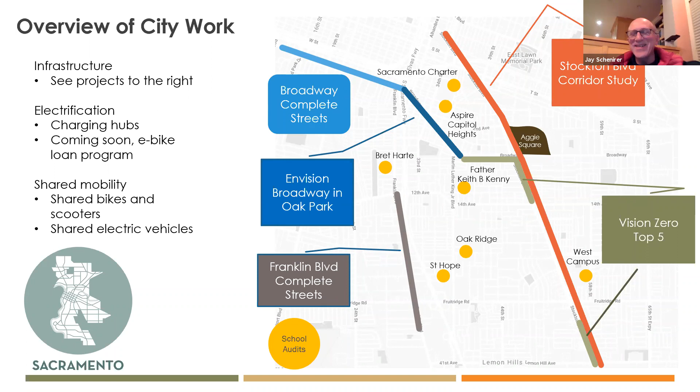Yeah, well, we have one quick question Eric is typing an answer to. I just did Google Maps, and it said about a 7-minute walk, 3 blocks, from the light rail to the hospital.

All right, terrific. Jennifer, go ahead and talk about some of what we're doing already. Great, thank you, Vice Mayor Schenirer.

So we're doing a lot of work. I've covered a lot of this already, but I wanted to highlight how it relates to questions around mobility, congestion and travel delay, and safety.

These projects will inherently improve mobility. However you move—walk, roll, drive, take the bus, share a vehicle—all of these will improve conditions, because our city is 170 years old, and a lot of our technology and infrastructure is almost as old as that. So we're working to improve that.

Whether it be a traffic signal or a curb ramp for a person with disabilities, or a parent with a stroller, we'll be improving curb ramps, because mobility really is about access and how we connect folks. That's why we're comprehensively building this connected map, thinking about the network through the neighborhoods and serving them for people moving around.

We're creating new bikeways. The Broadway and Vision Zero work on Broadway includes bikeways. The Stockton Boulevard project includes continuous bikeways north-south, where you see the orange area.

And obviously we're doing a lot of safety improvements. If you've heard me talk before, I'll continue to stress the importance of traffic safety in our city. We continually rank as one of the worst in California around traffic safety, and the biggest issue we face is speeding. One of the best things we can do is slow folks down, using signal technology to manage vehicle speeds while still allowing for throughput.

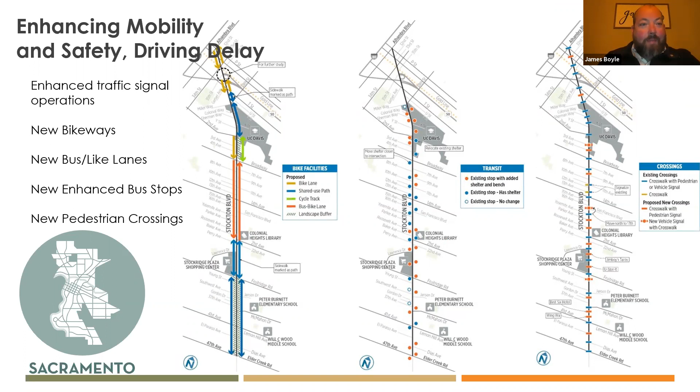All right, thanks, Jennifer. I'm James Boyle, Director of Planning with Sacramento Regional Transit, glad to be here this evening to talk a bit about RT and some of our services and transit mobility options for the general area. For those familiar with the area, we have Route 51, which is by far one of our most popular, most successful bus routes in terms of ridership and frequency.

And then we also have Route 38. This route basically connects from 65th Street Light Rail Station through down Broadway and then back up Stockton back into town.

We also have, I don't know how many of you are familiar with, our Smart Ride microtransit service. That service has a pickup drop-off location for UC Med Center, and it's connected with our downtown, Midtown, East Sac zone.

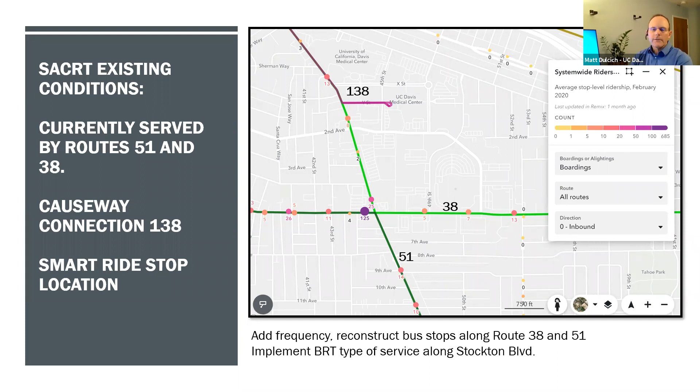Yeah, I think we do have some planning efforts coming up that are pretty exciting. We know, from public sessions and our own experiences, that because of the history of how these neighborhoods developed, the campus is kind of a blocker for access and routing—specifically east-to-west connectivity from the fairgrounds neighborhoods over to Oak Park, without a great route through campus, or north-south access from south of Broadway up to Elmhurst. One thing we're thinking of is to embark on a planning effort that would work with each of those neighborhoods to think about desired access points and comfort level once you enter campus and proceed on a roadway or sidewalk, and figure out a long-term way to open up those routes so the campus is less of a barrier and more of a connector for this part of Sacramento.

So that's an item we're really excited about, and it follows something we heard in early Aggie Square public outreach: a desire from neighbors for the city and campus to work more together. That planning effort for routes to and through campus would also be a collaboration to figure out, once you get off the campus boundary and continue westward, what's the best and most comfortable route for biking or walking to connect to the next neighborhood and the next. So that's one item coming up that's really exciting.

Another is more internal to the campus—a great idea of doing a new bicycle master plan, looking at the actual on-road facilities for bikes as well as amenities for cyclists, whether it's bike parking, bike lockers, showers, signage, encouragement, incentives, and ways to improve our messaging for cyclists.

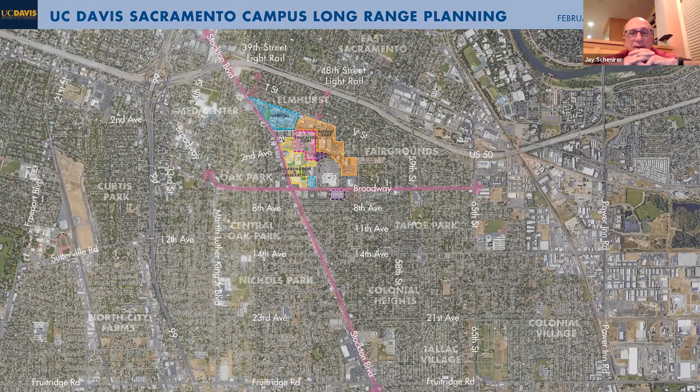Eric? Great, well, thanks for that, Jay. And first, actually, before we move on to that, I think there was a last question about whether the campus is moving further out than its boundaries. But that kind of tees up a little bit to the question about the coffee shops and the restaurants. So Bob, can you quickly answer that question, whether the campus is moving out of its boundaries within Stockton and Broadway?

Yeah, no, there's nothing in this long-range plan to move beyond the existing boundaries of the campus in the immediate Sacramento campus area. There are investments going on further to the east in the Rancho Cordova area, where some support service units are being relocated away from the campus, which actually is a somewhat mitigating factor to some of the new traffic demand that is getting generated. So some amount of the campus employee population is actually being moved to the east side of town.

But it does fit into, Jay, maybe on this, but it does fit into our overall Stockton Boulevard development plan about creating some synergy down the boulevard by making sure that even though the campus is going to be between the Stockton and Broadway area, we have opportunities for growth for businesses, for housing on Stockton Boulevard.

Yeah, we did, again, I would agree. And on this topic, the project that we're putting forward really does not have a retail component to speak of. So there'll be some convenience food on site, but I think it does present a great opportunity in the immediate neighborhood for walkability and for some small business growth nearby.

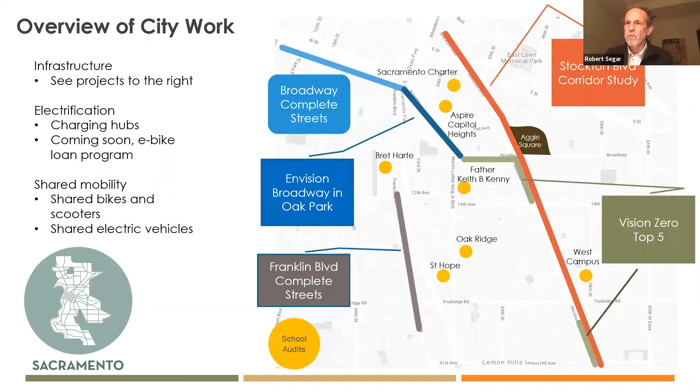Yeah, I can start on that one. So the existing Aggie Square site, just south of 2nd Avenue along Stockton, where you see the buildings there, that is a current surface parking lot. Most of the people who park there work at the hospital.

So we were very attentive to that, aware that a lot of the big parking structures near the hospital needed the supply so much to feed the hospital that they made them floor to ceiling. That's why we were really attentive in the Aggie Square plan to create public space that will be full of people along Stockton Boulevard, not the side of a parking structure.

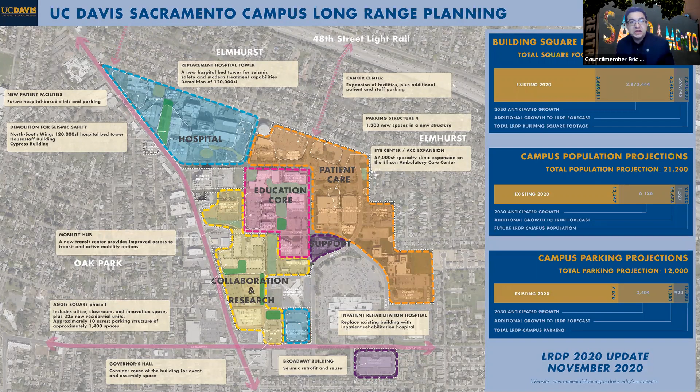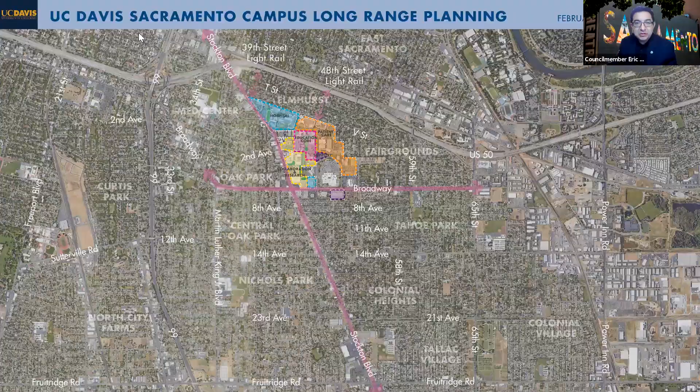Great. And then, maybe this is a question for Jennifer going wide here. It's the paradox that you create parking structures to avoid parking in the neighborhood, but the parking structures also create an incentive to drive. So Jennifer, maybe if you could talk a little bit about parking and why all the other pieces are interconnected to this question.

Councilmember Guerra, great connection of all the different pieces. It's a layered approach that we have to take, and it's an evolving approach, because we can't just immediately not have parking. If Aggie Square doesn't provide parking, people will still be driving at this point, because we don't have the rich transit, walking, and biking network yet, and folks are not living close enough. So there's this balance.

So there are a couple of things we can do. One, you'll see up here on your screen a map of the areas around Aggie Square and UC Davis that have residential parking permit programs, where you need a permit to park on street. It is obviously around the campus, but if there are issues, our parking division is happy to work with the neighborhoods to look at expanding that. So if anybody has those questions, just let us know, and we can get you in touch with our parking division who handles this.

And then also our enforcement to make sure that our parking enforcement officers are out there taking care of ensuring that you have your residential parking permit if you're parking on street in that neighborhood. And again, if that's an issue, we're happy to work with our parking division to bring those enforcement officers out to your neighborhood. But before we say we don't have parking, we really need to think about what are the other ways that folks can get to the campus.

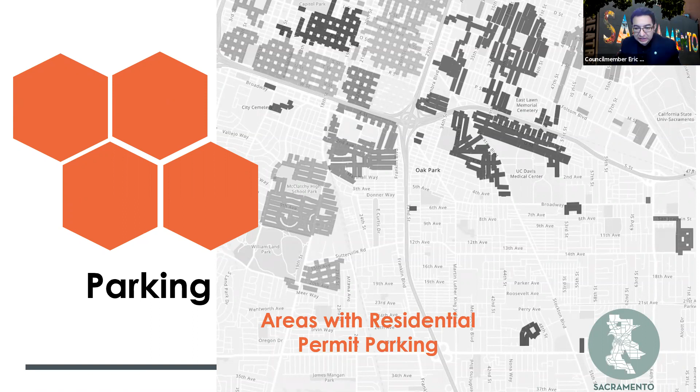I think if you want to move to air quality, that would be great. Yeah, so now we're moving on to air quality. So, questions about air quality.

The Sacramento Air Quality Management District, which a number of your council members, county supervisors, and representatives from all the cities sit on, submitted a letter regarding the environmental impact report about air quality.

So question here for Matt or for Bob: how do you manage and mitigate air quality when you have a growing project like this? And what are the things that UC Davis is looking at doing to manage and mitigate air quality?

That's great, and I'm glad we set up this air quality discussion to be part of this, because the two really are linked, with emissions from vehicles being large contributors to air quality. Thankfully, with a lot of leadership from the state, we have cleaner and cleaner vehicles in both current use and expected for the future fleet. Overall, the composition of vehicles on the roads is going to get cleaner over time. That's one thing supportive of our efforts.

Another is the shift to electric vehicles and the improved emissions that will come with that. So I think the overall trend is supportive of long-term, having cleaner air in our region, hopefully.

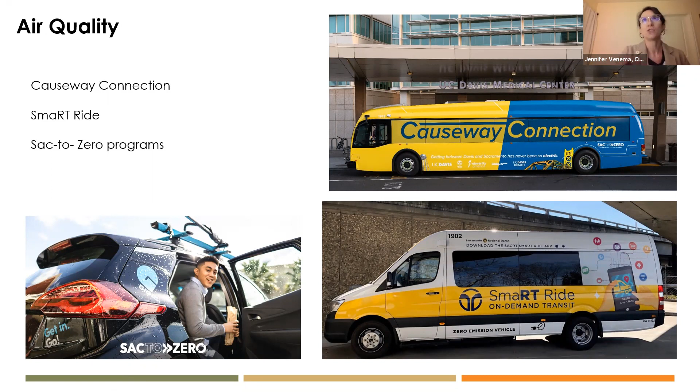And Jennifer, you could just flip it over to the next screen. But we also wanted to make sure folks know that we've really been doing a lot here to electrify transportation with a lot of citywide benefit and more to come near the project site.

Recently, we released the first electric vehicle progress report. I'll drop the link in the chat here, where you can see a lot of the accomplishments over the last couple of years. As I mentioned, over a $44 million investment since 2017, we've had a big influx in terms of publicly available chargers. We are one of the densest concentrations of fast chargers in the nation, and we're doing more.

I'll put more information in the chat, reach out with more questions, but just want to emphasize that we've been able to achieve some really exciting progress leading the nation for vehicle electrification because of the strength of our partnerships.